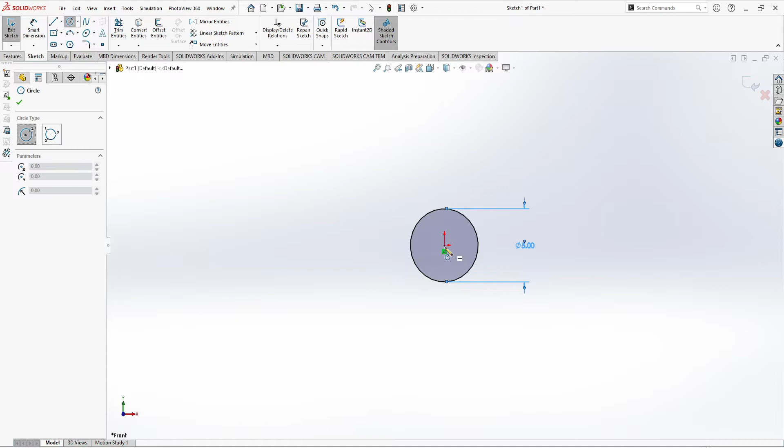Again another circle of, I think, 15 mm. What happened to this now? I think it's taken. Okay, let's go with 15.

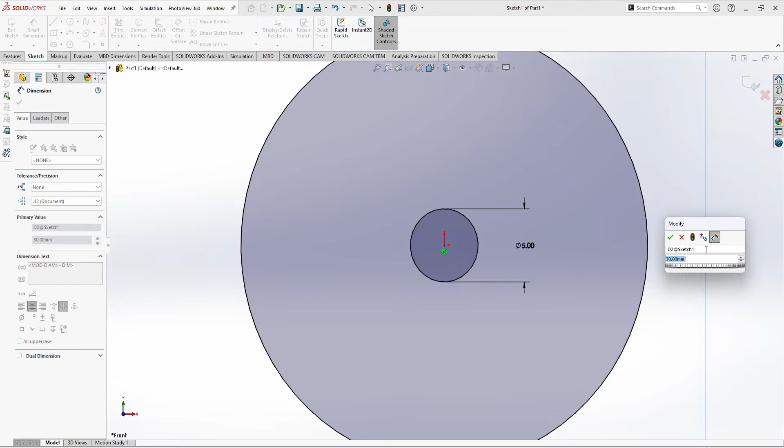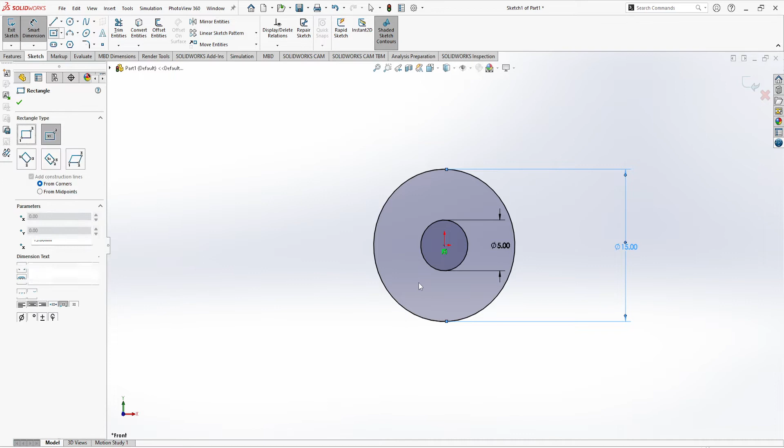15, okay, that's good. And now what we are going to do is design, let's go with a rectangle. Not like that, like that. Let's go with the smart dimension, let's go with 10 mm.

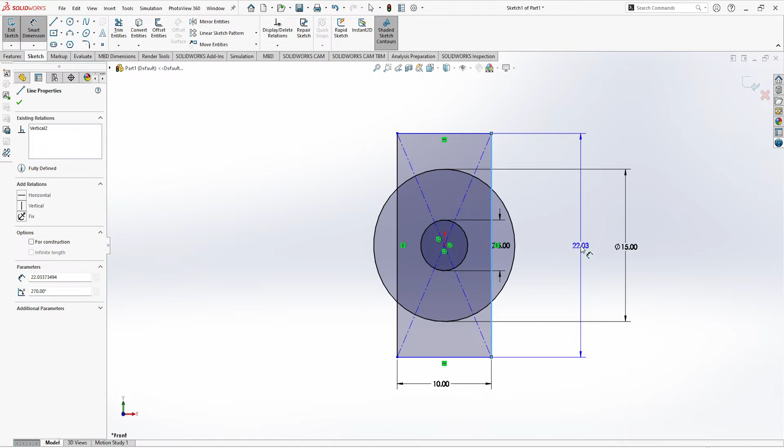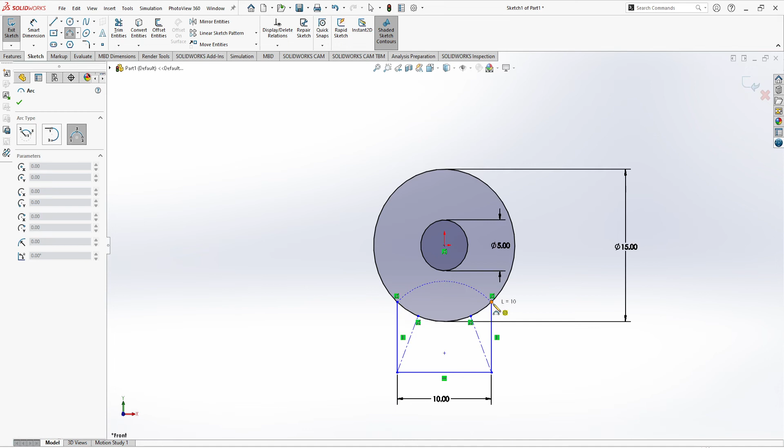And for this, what we are going to do is select 25, I think so. And now what we are going to do is simply trim these parts, and let's select an arc, a 3-point arc actually. Select this, and select this. So this part is now ready.

So what we can do now is go for sketch, select the linear circular pattern, and just delete this one. Let's select this one, and I think that will be okay for the 4. Let's hit okay.

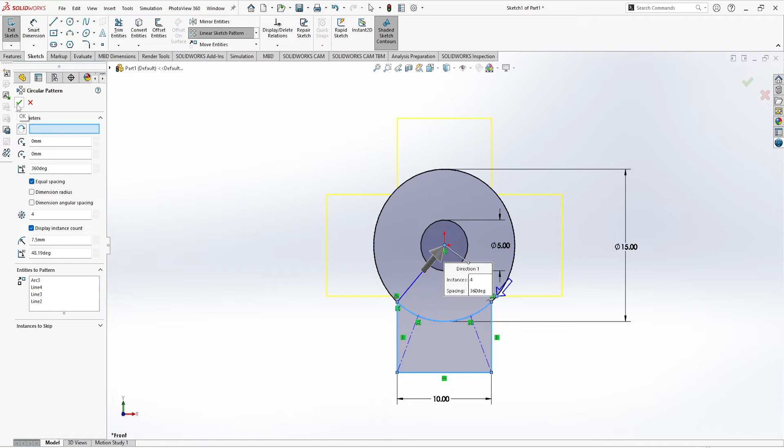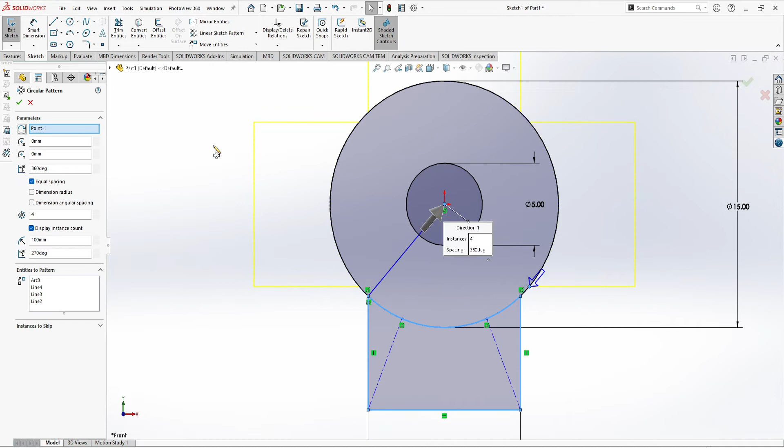It's not taken effect. Let's go for sketch again, select this one, go for circular pattern, and hit ok. Now it's taken the effect.

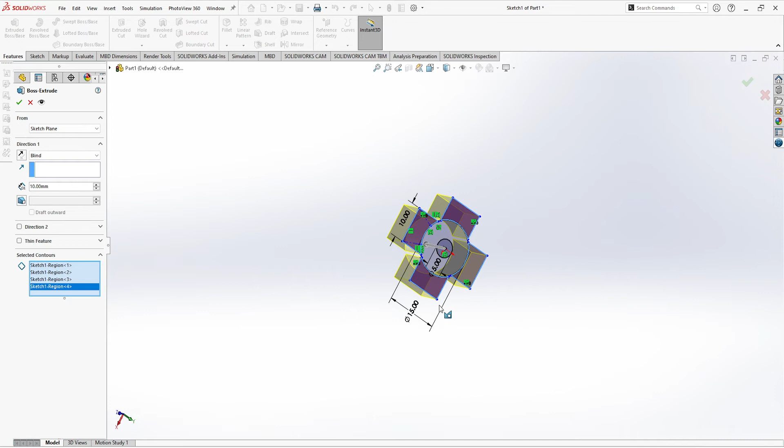So now what we are going to do is simply extrude these parts. Select this one, this one, this one, this one, and the circle one, to 10 mm. That's okay.

Now what we are going to do is select this plane, go for a sketch, and draw a circle over here and another circle over here. Let's give them the dimensions. This will be of 5 mm, and this will be of 15 mm.

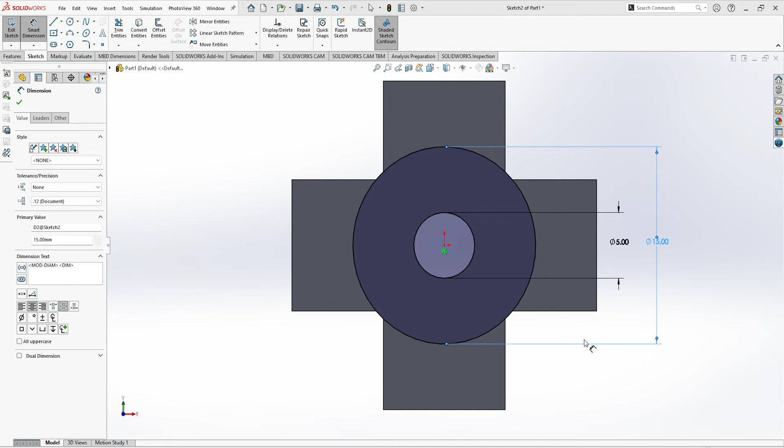Let me disconnect the internet first. Yeah, and now what we are going to do is extrude the base, up to 15 mm. That's it.

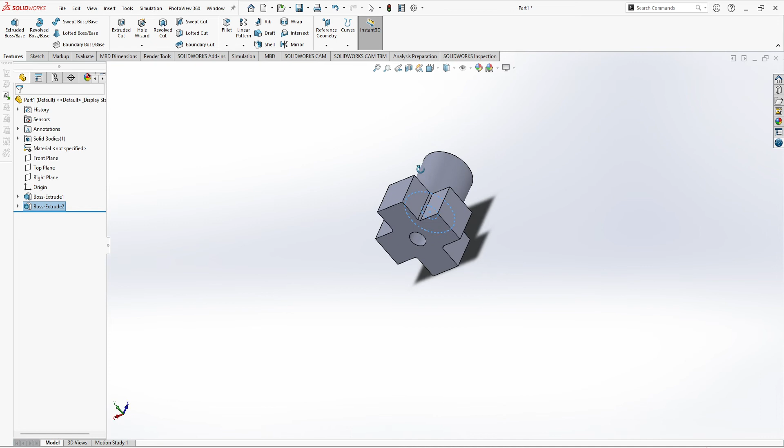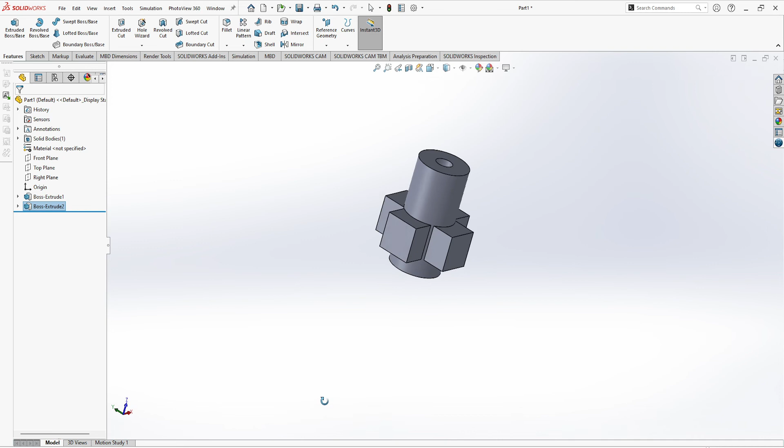And we have to extrude it up to both sides. So what we are going to do is edit this feature, and for direction 2 we will take it like that. Hit OK, and now what we are going to do, it's more of what we needed for, but let's go with this.

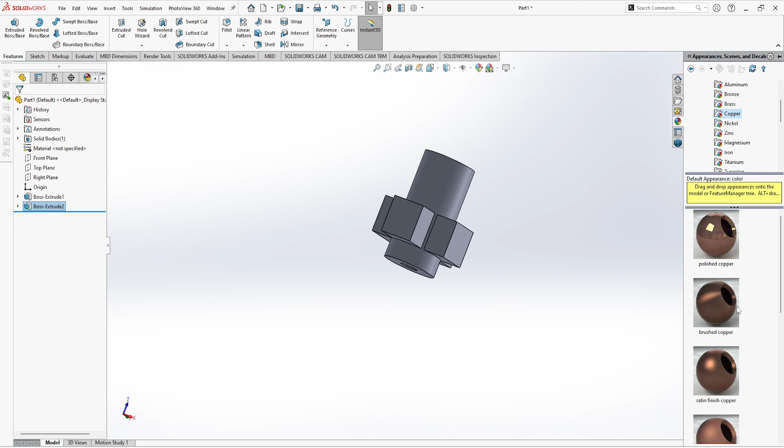Let's set the appearance for this. For appearance, what we are going to do is go for the appearance and metallic color. Where is the metallic? And what we are going to do is select the bronze or the brass one. Is there, yeah, copper. That will be exactly what we needed for, not the complete part, only that face and this face too.

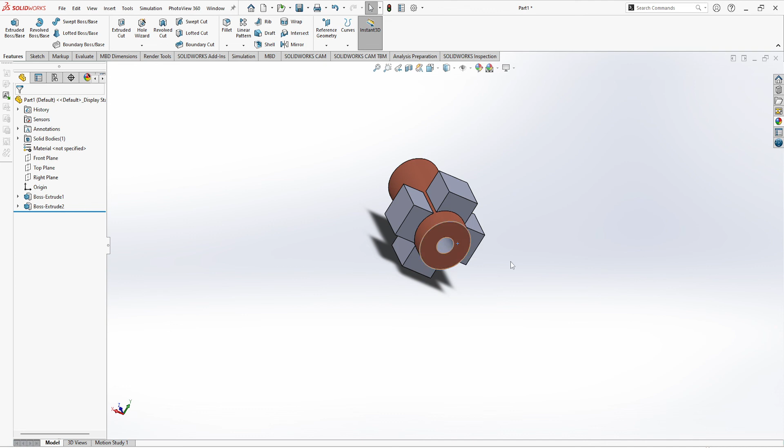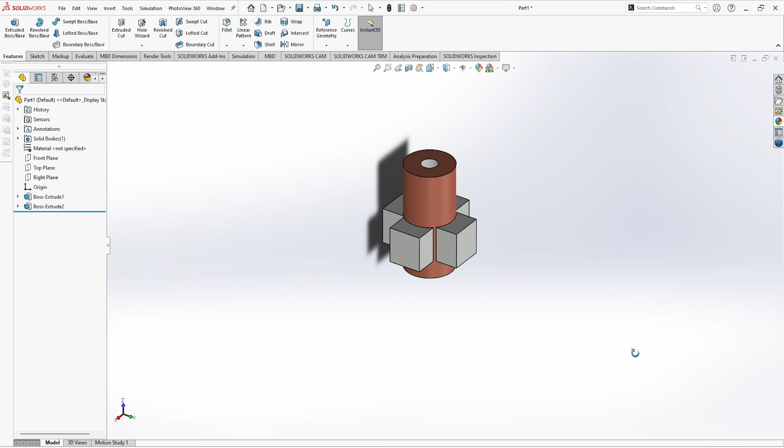This one too, yeah, and this will be the iron part, or we can go with the zinc, brushed zinc, yeah, that's okay. So it will be a part of the stator where the metal, actually the coils, are soldered.